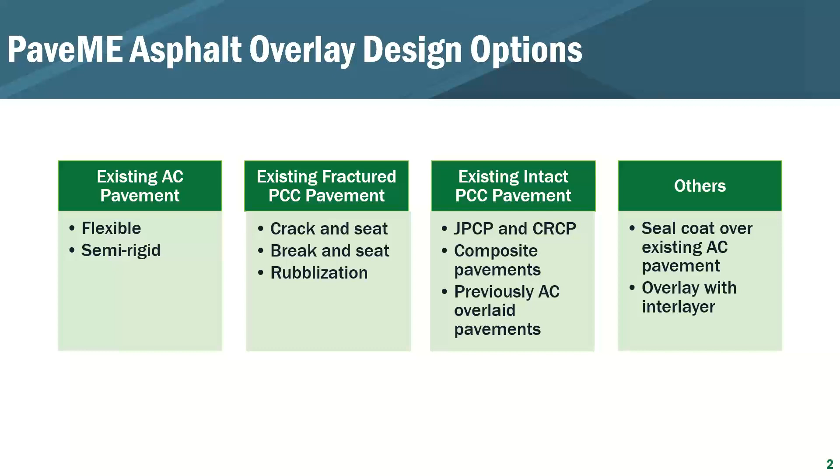Seal coats and overlay interlayers, we are not going to discuss at all today, so that'll have to be maybe another session.

As Kelly also noted, for the example that I'll be demonstrating today on asphalt overlays of an existing asphalt pavement, it's based on information obtained from Harry at Virginia DOT. For both this session and the next session that I'll be presenting, it is based on the information provided.

Probably one of the big things when we received the files from the DOTs, there was a version difference. My company only has version 2.6, and both the Virginia example and the next example were based on an earlier version. So I had to still use the material property information from the DOTs, but I had to switch back to the global calibration values just to be able to run this example.

So again, the example I show you is based on an actual project, but the calibration coefficients are global, so there may be differences than what the DOT would actually see. So Harry, don't be too surprised at the results you'll see on this analysis or demonstration.

So the project is on a four-lane divided rural interstate. As I said, the modifications had to go to 2.6. The climate location was slightly different—we were having a couple of challenges getting the original climate file to load, so we picked one that's close. And of course, as I said, the global calibration factors are slightly different.

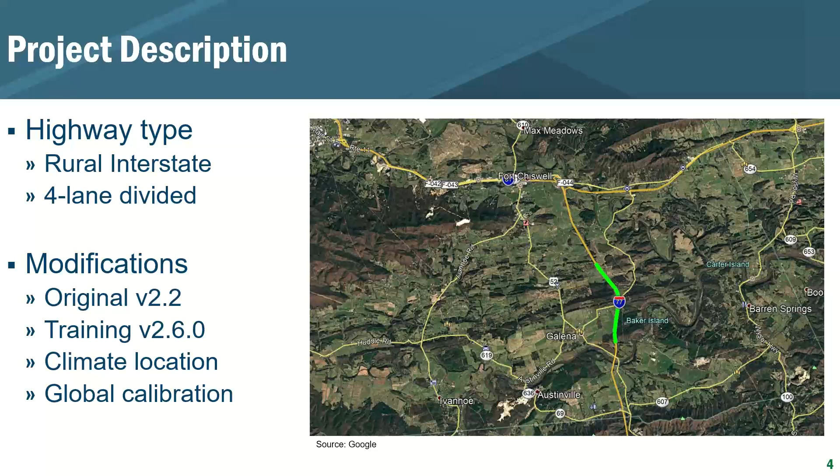The distress prior to the overlay—the overlay was conducted after 2010. You can see here IRI is the circles, and rut depth is the triangles. There's a little bit of variability in data collection, but we also kind of know the reasons for some of that variation. Pretty much really good IRI, holding in the 80s, the high 70s to low 80s.

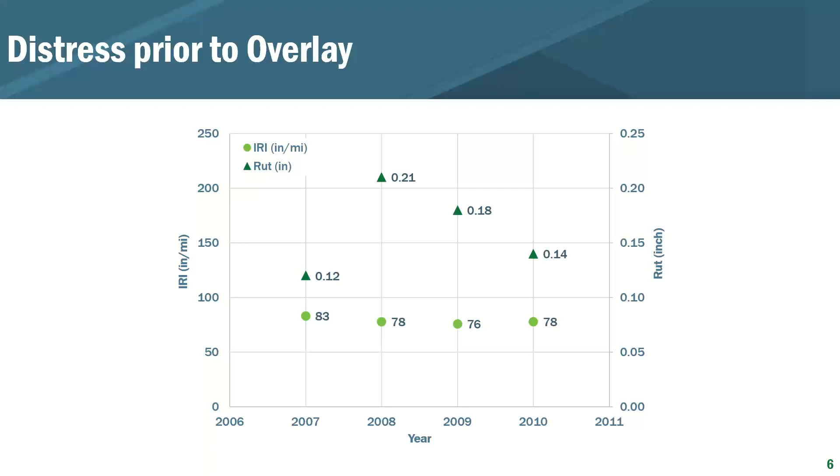The rut depth, at least in 2010, is about 14 hundredths of an inch, so a little bit of rutting—still pretty good. But certainly the issue now becomes alligator cracking and the presence of transverse cracking. Alligator cracking is shown in circles, transverse cracking as the triangle shapes. You can see a better trend here, showing that in 2010 there was a little bit more than 15% alligator or fatigue cracking and about 3,000 feet per mile of transverse cracking. So again, the predominant distress for this case is cracking, more so than rutting.

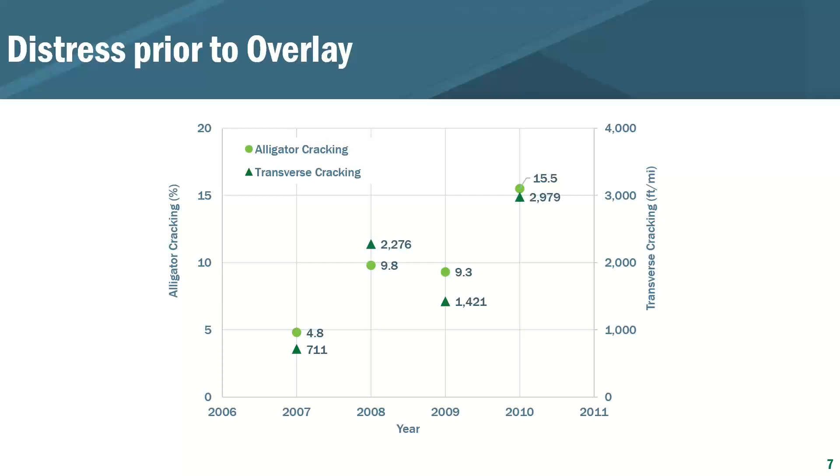All right, now what I'm going to do is go through a demonstration of the software—during a webinar, as you know, that's always a risk. So what I'm going to do is go through and do screen captures and try to demonstrate the process through those screen captures. Hopefully that'll be good enough information that you guys can actually follow along.

I'm just going to tumble through the PaveME inputs, top to bottom on the left-hand side of the input screen. The first one is just to show that, hey, we're going to do an overlay of an existing asphalt pavement. Design life is 15 years. The original was built in '78. Construction was in June of 2010, with traffic loading starting September of 2010.

The existing pavement, as you see on the right-hand side, we've got some overlay thickness. We've got 12 inches of existing asphalt, 8 inches of an aggregate base, 6 inches of a fill material that has a CBR of 30, and then an A-7-6 AASHTO subgrade classification.

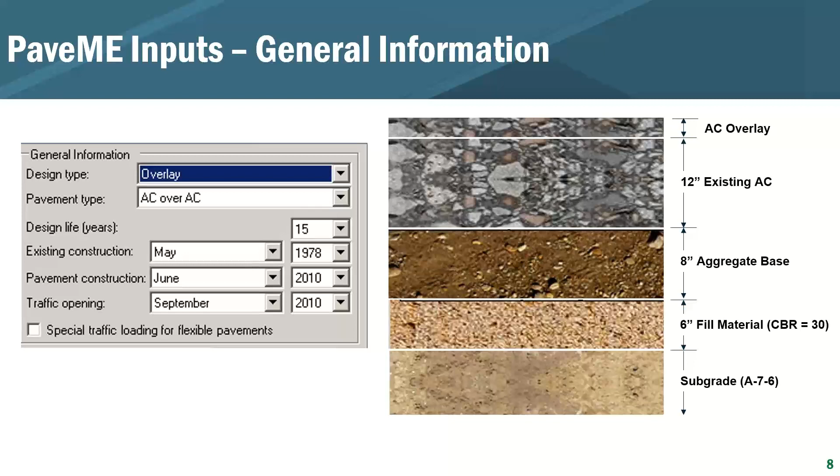All right, so the traffic screen, and I'm not going to bore you too much with all the details, but I will kind of show you the information that was included for this design, and we'll blow them up as we go through, just so you can see it a little bit easier.

So the two-way average annual daily truck traffic is at about 11,200. Number of lanes in the design direction is 2. The percent of trucks is 50%, and then 90% of those in the design lane with the operational speed. For this case, the traffic capacity was not enforced.

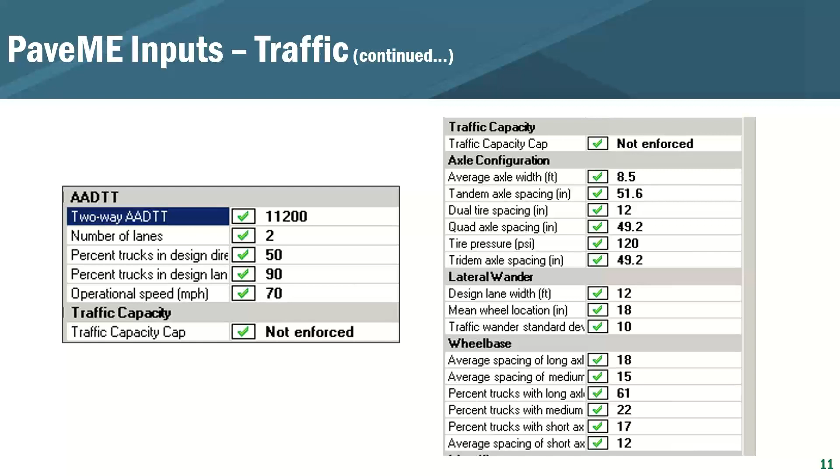I believe on the right-hand side, the configuration, the wander and the wheelbase is pretty standard. I believe they're all default values that were selected for that, so probably nothing too exciting to change there. But certainly, if you have a specific or a special loading case, that certainly can be modified.

The distribution of vehicle class and the growth rate, I think, is just taken from the traffic information, and then the DOT used a growth rate of 0.7% compounded over the life.

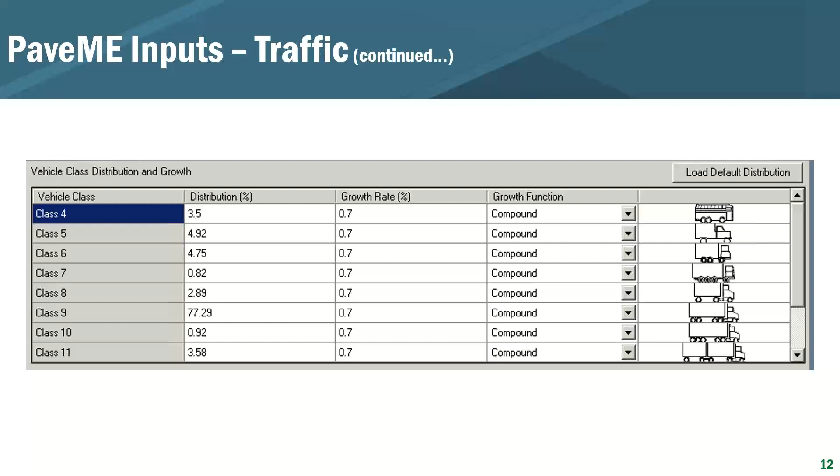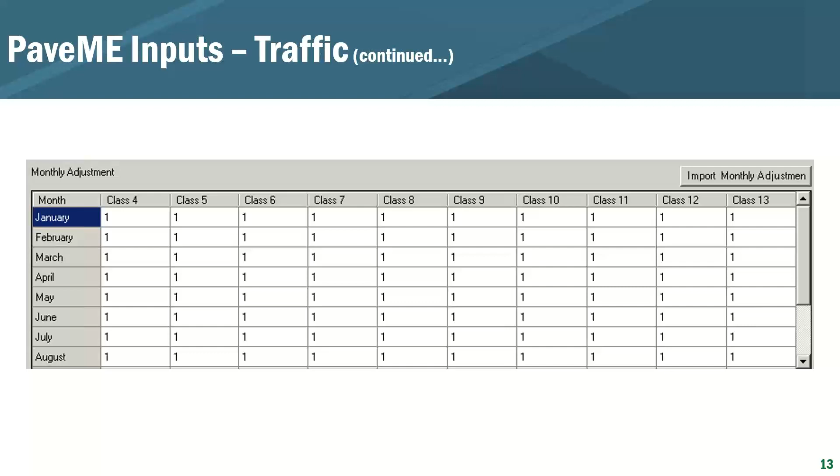As far as the AC layer properties go, there's a number of them. Certainly going in and doing an interface, doing the endurance limit, whether you include it or not. In this example, we did not use the endurance limit, but you do have to go through in the AC layer properties location and identify the rehabilitation level.

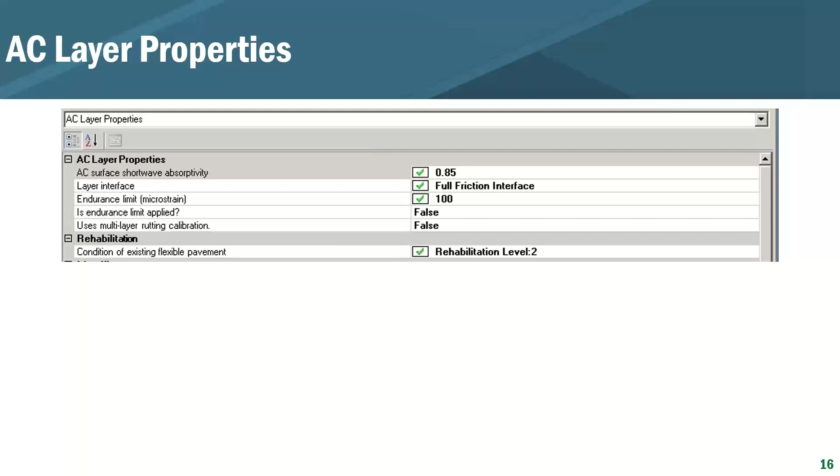And so you actually get a couple of choices. Certainly you can go level 3, level 2. Level 3 gives you much more of a general condition, whereas with level 2, you can actually get into more specific details of the presence of distress.

So both of them have the ability to include the mill thickness, which in this case we used 2 inches. They also have the ability to put in rut depth, so we went ahead and did those regardless. But certainly where they differ is in this structural rating, environmental rating versus actual distress. And if you've got the data, it is always best to use it.

And so we would proceed forward in this design example using the level 2 analysis, and so that would be the case. And I know that's supported by at least all the discussions we've had in the user group meetings. If you have a higher level of input, go ahead and use that if you feel comfortable with the information contained in your database files.

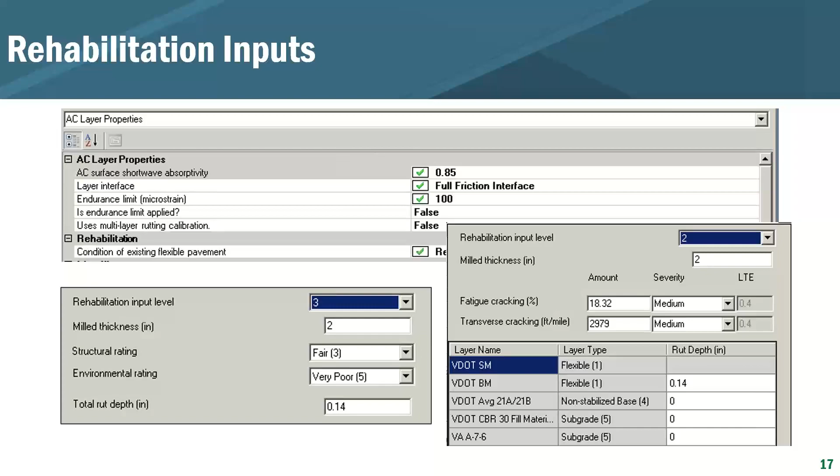All right, getting into the AC layer properties. A lot of this information, hopefully, you've got contained in your materials database that's been transferred over, so we can go ahead and use that from the Virginia file we were sent. We had all that information, so we'll go through the inputs one by one, but much more in general. I don't want this to be an exercise of entering data into a spreadsheet or into the software, so we'll just hit the highlights of what was used in this training module.

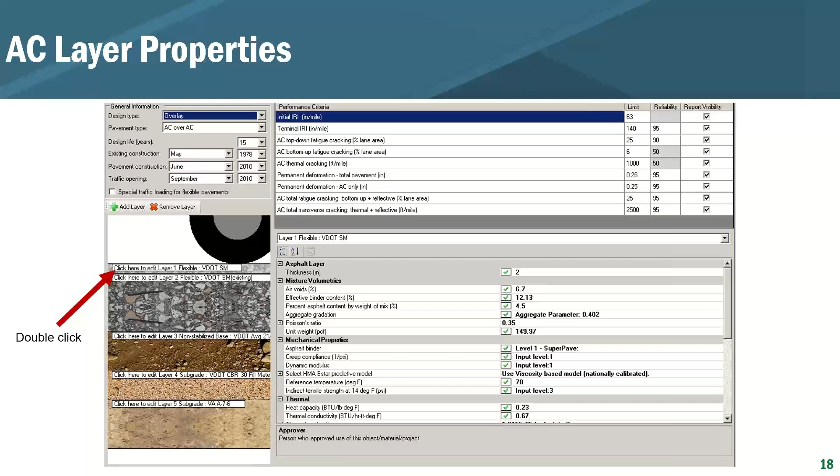As many of you know, you double click on the layer in question to edit it, and that brings up the tab where you can see your thickness, your mixture, mechanical properties, and thermal properties.

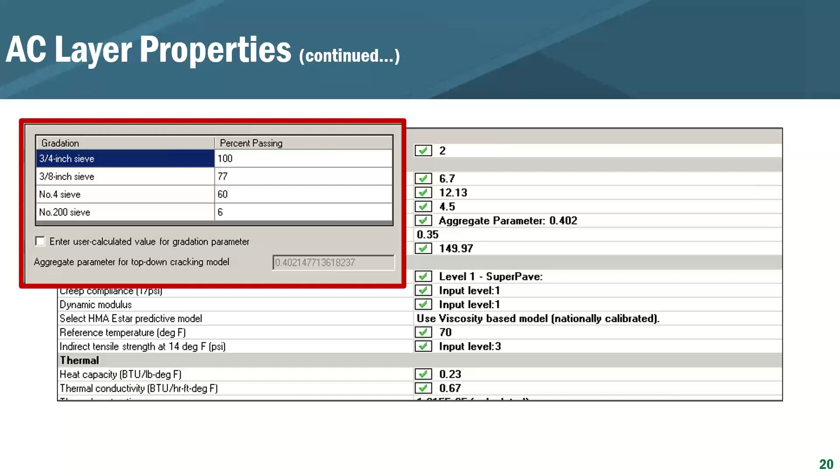Certainly the aggregate parameter allows you to input your sieve sizes on the 3/4 to 3/8, the number 4, the number 200. Going down for the Superpave or level 1 on the mechanical properties, you can go in and, if you have that information, put in your temperature, your binder G-star, as well as your phase angle.

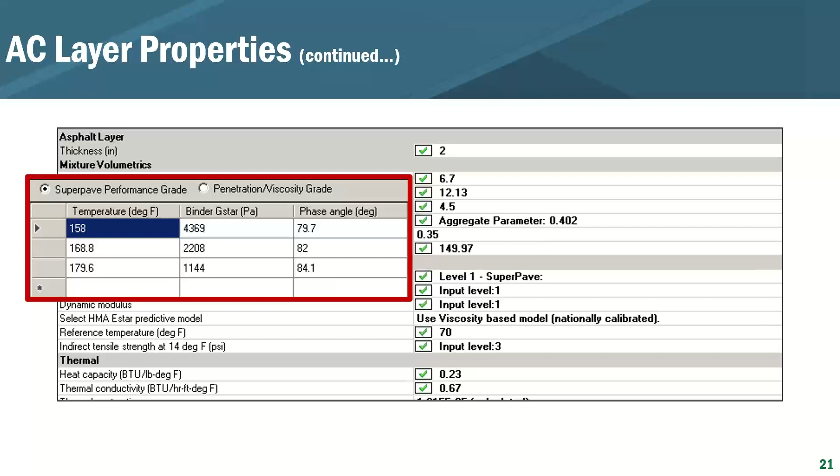Same with creep compliance, you can load in that amount of information. Similarly with the dynamic modulus, you can go in and put that information. And for both the creep compliance and dynamic modulus, you can change your level of input.

So if you put these into a level 3, it'll change that top defining point from level 1 Superpave to a level 3 when you change your dynamic modulus and your creep compliance back to those values.

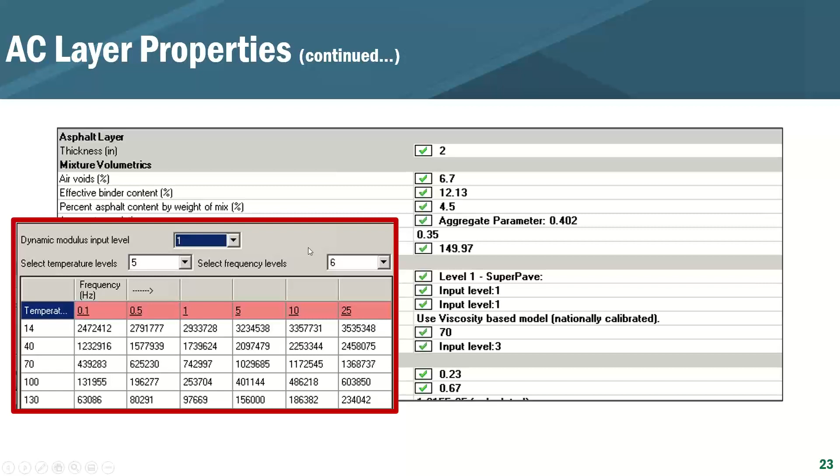And certainly the indirect tensile is the same. You can either go in and use a level 3 input, or you can use the G-star based model, but that's not been nationally calibrated. So I know that for the most part, a lot of agencies are using the viscosity-based, nationally calibrated model. But you have the ability to change that, to change the reference temperature, and that type of information if needed.

And this is just a summary. I didn't want to go through the layer properties for both the asphalt overlay and the existing, so I really just summarized it here on this table, showing what was used for mixture, volumetrics, mechanical properties, and thermal for both the overlay, what I just ran through, and the existing.

I think probably the key here is the air voids on the existing are slightly lower than what was used in the overlay, same as the effective binder content. And for the existing, it was a PG 64-22 for the asphalt binder, but everything else is pretty much very similar. The thermal properties are the default properties used in this case.

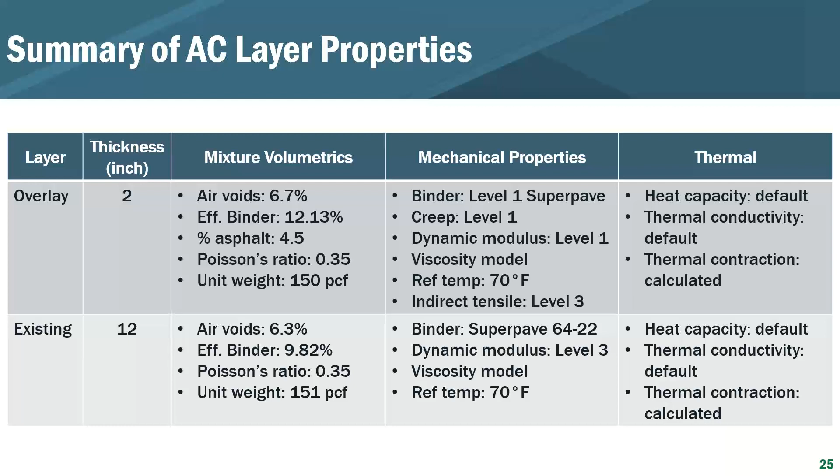Similarly, when you go through double clicking on the base and the subgrade layer properties, probably the modulus is of interest here. And there you've got the option of going input level - for input level 2, you can go in and select your type of material or type of evaluation, be it resilient modulus, CBR, R value, and then put in that value for that particular method.

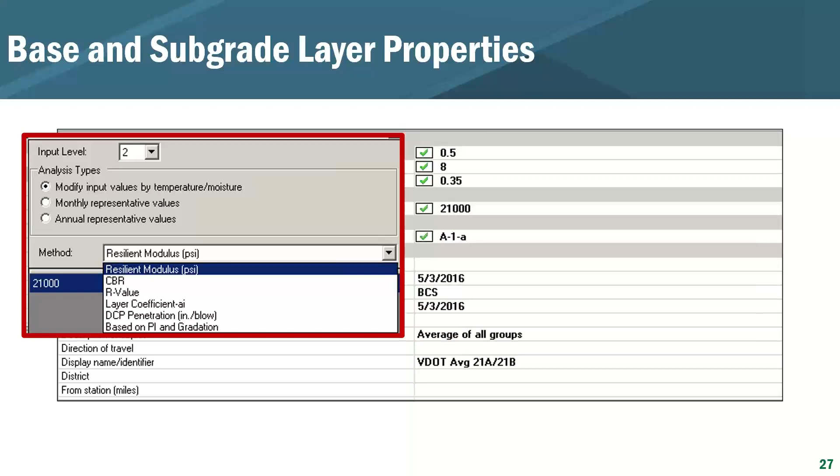Certainly you can also go in and change or select your gradation, putting in the gradation, the liquid limit, the plasticity index, all that information. Or certainly you can do level 3 and just go in and select, hey, I've got an A1 soil, bringing in all the information needed for the analysis.

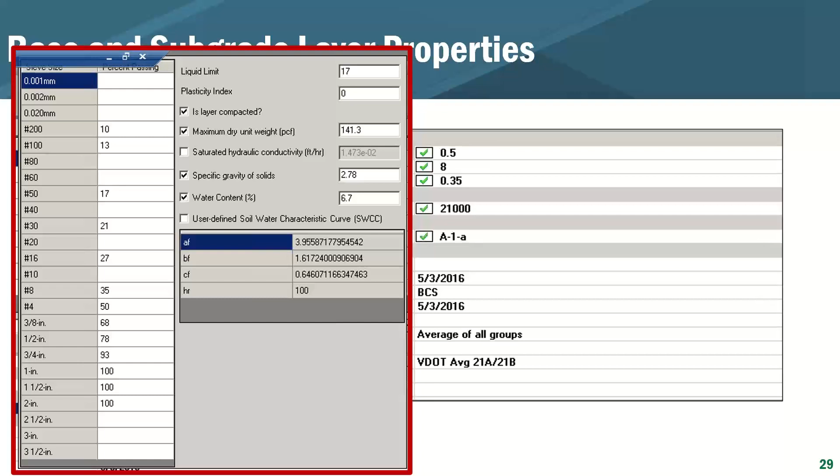Similarly to the asphalt, I went ahead and summarized the unbound, subgrade, and base layer materials. As we noted, the stabilized base or non-stabilized base is 8 inches over 6 inches of fill over the subgrade. You can see the unbound coefficient layer of earth, lateral earth pressure, Poisson's ratio, modulus, and soil type for each one of those layers.

This is just the output from the PavementME PDF file. I chopped out the middle piece, which talks about the asphalt binder, because I really like to make sure when I go through and actually do a design, did I put everything in right? So I really do look at this particular output from the program just to make sure that, yep, I did put in 2 inches of an overlay, and yep, the existing is 8 over 6 inches of fill material.

I always like to look at the heavy truck traffic as well, again, to make sure that the values I thought I input are actually what I input. But it's always interesting to me to see the impact of the heavy trucks over the time period. It's always surprising how quickly 15 years of traffic accumulates. I'll have to say I still miss ESALs, but I know the switch to heavy trucks is happening, it's just certainly slow, at least for me.

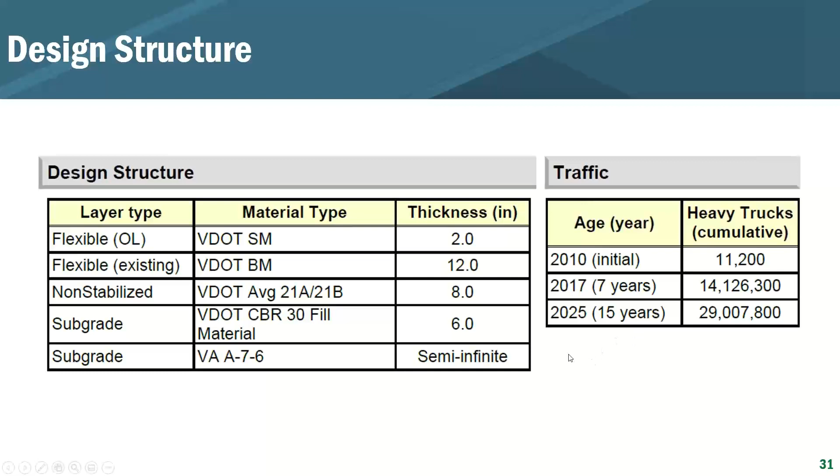All right, so what I wanted to go through is kind of evaluation scenarios. I think what is intriguing about PaveME certainly is the process it goes through, the whole mechanistic empirical. But I think, what do you do with the output? Is it just something that hopefully everybody's getting a good sense, getting a good feel for the impact of changes to designs and how that influences performance.

But also it's something that hopefully you're not working in a vacuum. And if PaveME comes back and says you need 17 inches of asphalt, maybe you're doing that little data check on, maybe that doesn't quite pass the test.

So rather than get into a lot of the specifics of software operation or the workings of the verification, calibration, the model development, what I really wanted was to highlight, so what are the results? What do you get if you go through different types of scenarios using the PMED for evaluation of any given project?

But for this one, the file that we received from Virginia was a 2-inch overlay, or a 2-inch mill and a 2-inch overlay. So pretty much just a mill and fill type of operation. So I said, okay, let's see what's the impact of no milling with an overlay, what's the impact with mill and fill, and then I'm going to vary the thickness of the overlay on that one as well.

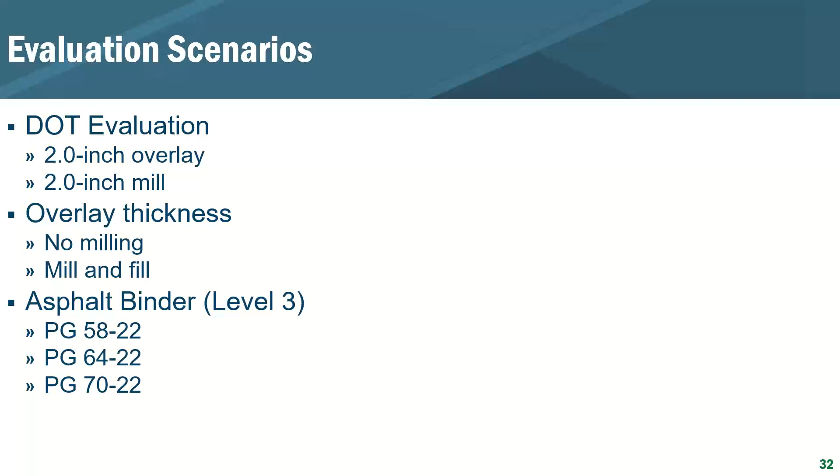All right, and so here again, I'm not going to drag you through all the various databases or the various tables and graphs that are populated in the output of the PMed runs. I'm really just going to focus on the condition, the target value that we used in the analysis, and then there's going to be a series of columns added to this table that demonstrate the evaluations that we did. And again, just to remind you that we're looking at 95% except for the bottom up and fatigue and thermal cracking, where we used the 50% default value.

All right, for the 2-inch overlay where we did no milling, certainly the IRI fails to meet the criteria. But I also would have to say that Harold has said this many times in our past meetings: don't change your overlay thickness because you're trying to meet IRI. And I completely and totally agree with Harold on that. There isn't performance-based information in PMed. Certainly they had to make, as many of you remember, a lot of assumptions in being able to predict IRI.

And I guess my other comment too would be that Virginia had great IRI on this road prior to the overlay, and even though their target is 140 in their design process, we didn't see that type of effect on the previous road. It was maintaining a pretty low IRI throughout the process. So again, I think you always have to take IRI with a grain of salt before just saying, yep, I've got to make my pavement thicker, or I've got to change something to meet IRI. So always be leery with that one.

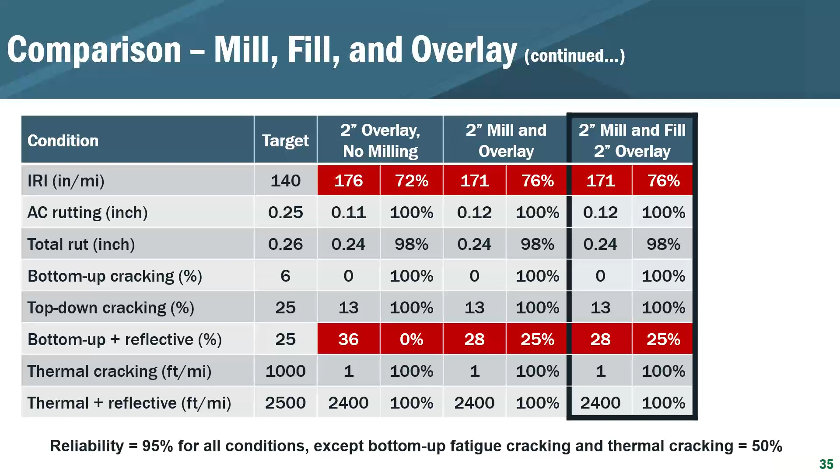And again, that's not maybe cost effective. There may be methods that a DOT knows help improve the reflective cracking or help minimize it. And so certainly those types of activities should certainly come into play rather than just automatically increasing the asphalt overlay thickness to get rid of some of the distress types.

All right, and this is just a caveat in the manual of practice that pretty much says, hey, the LTPP information obtained to develop the models used for the local or global calibration were based on information that may not have shown that there was a difference. In the LTPP, there wasn't really much of a difference in performance, mill versus no mill, using an interlayer versus not using an interlayer, using a seal coat versus not using a seal coat. And certainly if any difference does exist between a mill and a no-mill situation in your agency, those should be used in the calibration process. But the globally calibrated models did not show a difference.

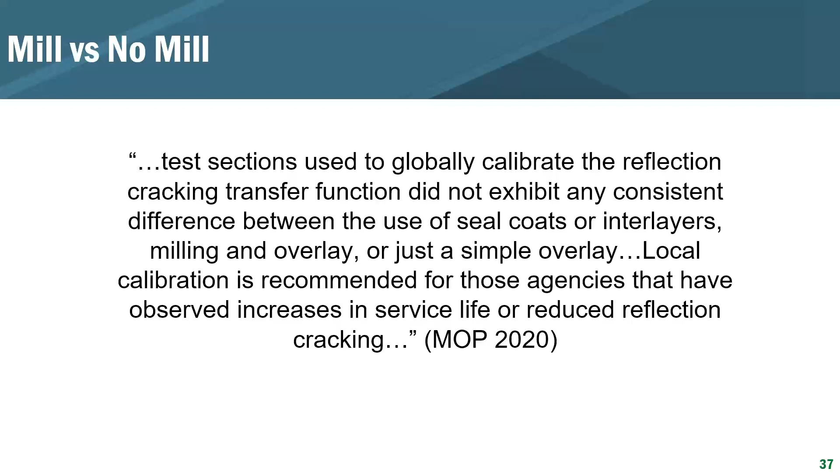So with that, I also said, okay, let's go back and see what changing the binder grade has to do with it. I had to disconnect the level 1 material properties for the asphalt overlay. Since I don't have Virginia's material database, I'm just trying to demonstrate the difference rather than give an absolute value. So I changed the inputs on the asphalt layer to allow me to put in a level 3 and put in the PG grade.

So try not to go, wait a minute, how come all my rutting is higher? Because it's different. It's a different process to do the evaluation.

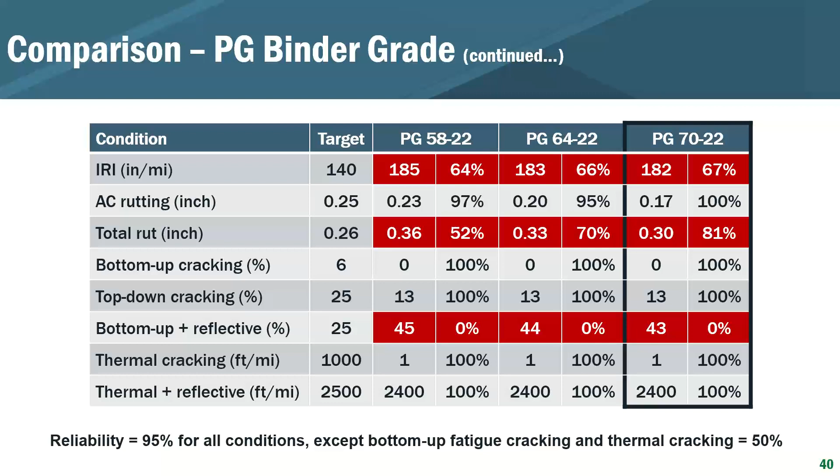And we slightly changed the bottom-up reflective cracking, but again, we're not expecting a change in PG binder to actually stop some of the reflective cracking. So by itself it would not do that. So, all right, that was a fast whirlwind tour of the asphalt overlay of asphalt.

Here it is again, you've got now an urban highway type, 4-lane divided, and similarly the same modifications we had to do to get the evaluation to work in the current version of PMED. Justin had provided us the original file based on version 2.3. We used version 2.6, so again we had to do a slight change in the climate location, as well as using the global calibration coefficients rather than the ones provided by Justin. So here's a shot of the pavement.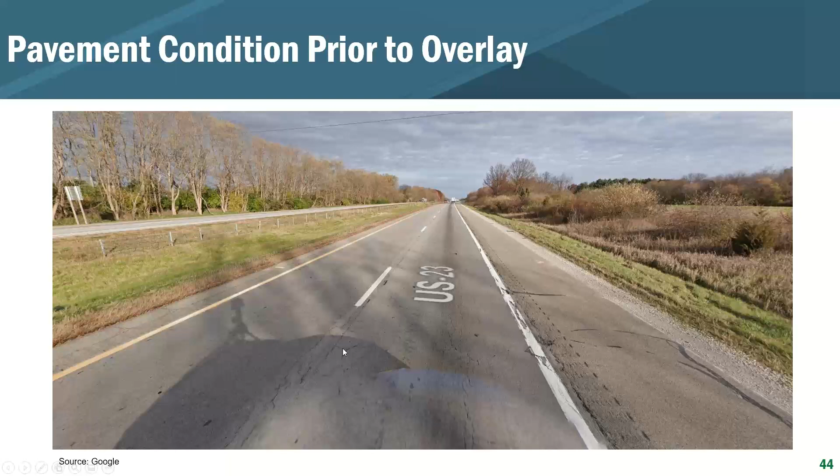This is on US 23. Again, you can see the existing has got a couple of shoulders, a narrower left shoulder and wider right shoulder. You can see the lay of the land, so to speak, and some of the existing condition of the pavement. Again, just another shot to give you that perspective.

The distress prior to the overlay occurred, at least in 2019. The distress was this distress index that the Michigan DOT uses, looking at the IRI as well as rut depth. Rather than a year, I was actually able to get the information along the project, and we go from milepost 0.5 approximately to almost milepost 10. You can kind of see how that distress changes, and the index pretty much is on a scale from 0 to 100, 100 being good. So you can kind of assess there, as far as their distress index goes, there is cracking happening on the pavement prior to the overlay.

IRI is relatively good, getting a little on the high side, but still well within the acceptable range, and very minimal at least in the increasing direction. We only had about a tenth of a weighted average of rutting, whereas in the decreasing direction it's almost twice that - again, not a terrible amount of rutting. IRI is good, and as I said, both the increasing and decreasing directions have a distress index showing, so they do have cracking occurring prior.

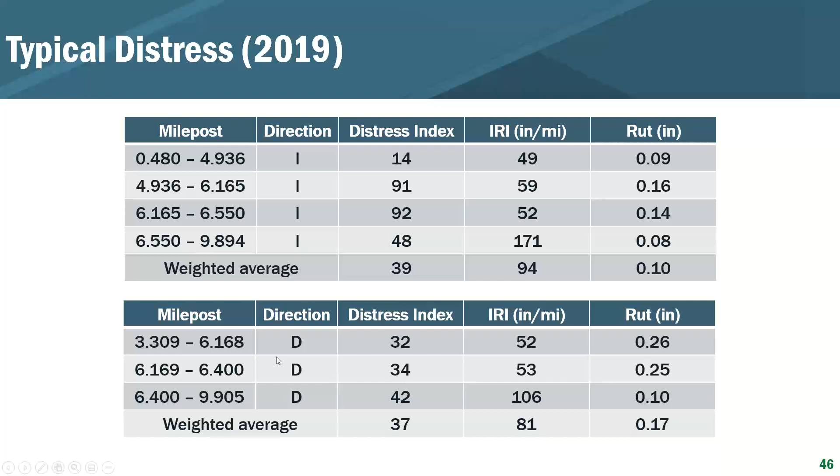For this, the Michigan DOT uses an initial IRI of 67, terminal of 172, and again similar as far as the reliability goes. It does use 50% now for thermal cracking, as it does with the AC over AC.

Again, similar default values for thermal cracking, with total thermal plus reflective of 1,000 and 2,500, and top-down cracking of 25%. A lot of it is very similar. Here, Michigan wants to know if their design exceeds 15% while underlying cracking of the JPCP is still occurring. So there's a way they're also aging the distress in the JPCP, much like they were doing with the asphalt. The existing pavement does continue to fatigue with time.

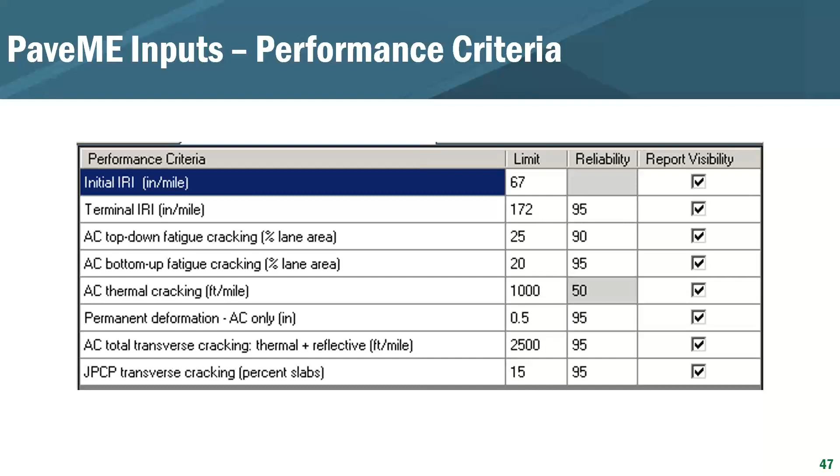In this similar case, we've got the AC overlay. The existing asphalt is 2 layers: one is 2 inches thick, the other is 3 inches thick, over 9 inches of JPCP. There's a 4-inch aggregate base, 10-inch sand base under that, sitting on top of a clay subgrade with a liquid limit of 33 and a plasticity index of 15.

Again, we're using an asphalt overlay of a JPCP and looking at a 20-year design life. The original was built in 1961, with the new asphalt over the concrete being placed in 2023, a couple of years after the 2019 date. So the pavement continued to deteriorate between 2019 and the intended overlay of 2023.

Similar to the asphalt over asphalt case, there's traffic inputs, and I'm just showing this so you get an idea of what information was used. Two-way AADTT was about 7,900, with a 51-49% split in the direction of traffic, and 92% of it is in the design lane for this analysis. Again, the DOT did not put a traffic capacity cap on the analysis.

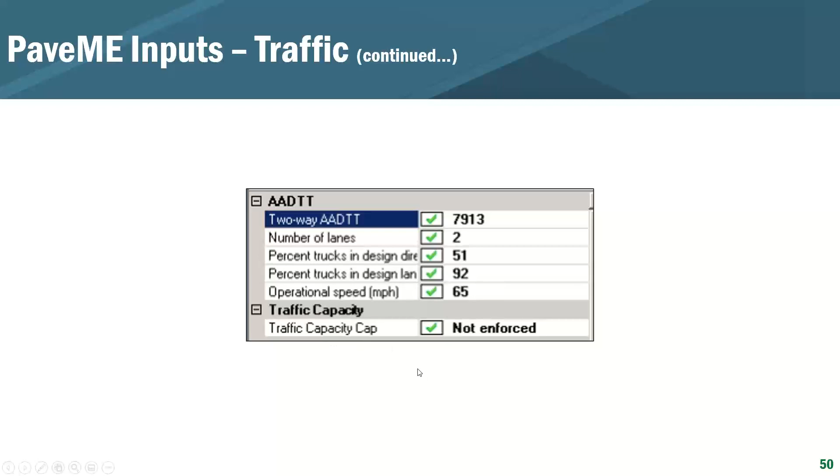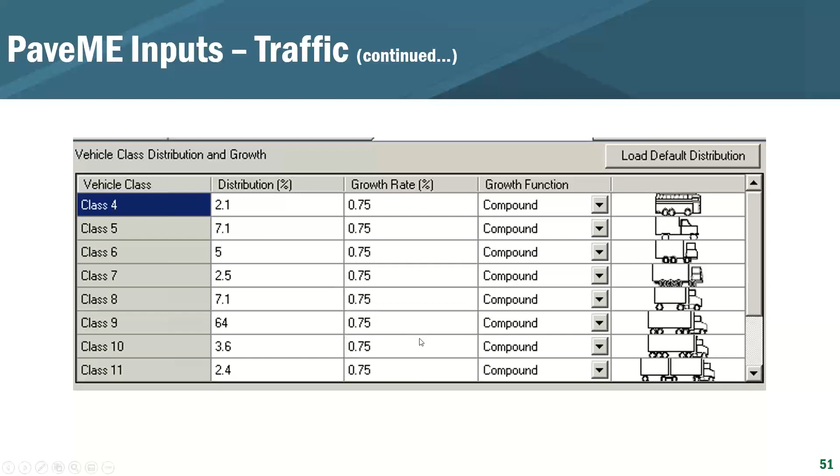Growth rate in this case is going to be very highway-specific, but here the DOT is looking at a compound growth rate of 0.75% for all vehicle classes. The distribution for this road differs depending on the class of truck as well as the month. I'm only showing you through August for simplicity, but there's a similar type of variation in traffic for the remaining months.

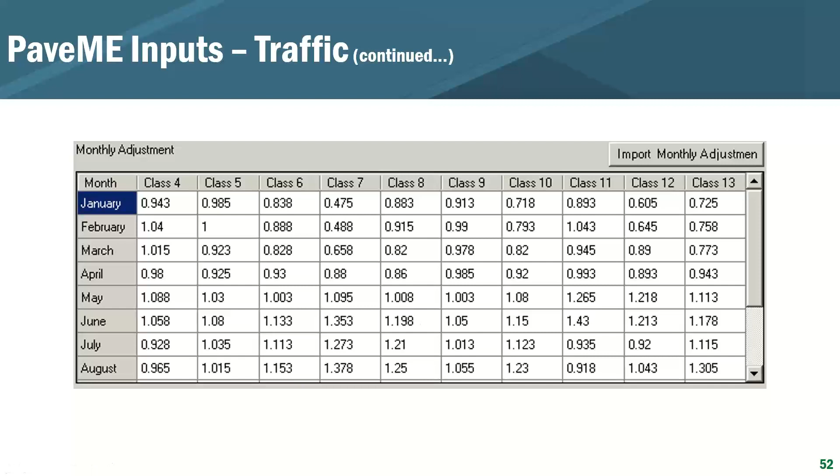So again, it's based on the traffic information you get, and hopefully this is in a database so nobody is typing in all this information, which I know the majority of DOTs have. That's a good thing. Similarly, as before, you're able to vary the class of truck by single, tandem, tridem, and quad axle, and put that information in. That's pretty standard equipment and information.

Here again, being able to pick a location of the project in Michigan. We had it slightly different than what was provided, but it's still pretty close to the information we were able to grab.

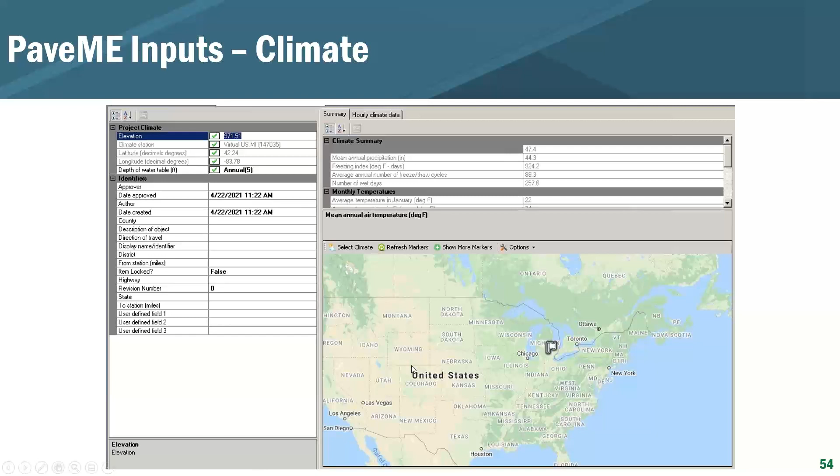Different from the AC over AC case, for AC over JPCP you need to go in and include the design properties so that we know the dowels used in the jointed plain concrete pavement, the joint spacing, and all that type of information. This is needed to help in the performance prediction, and certainly for quantifying the continued damage that occurs in the JPCP layer.

So here we're just looking at dowel joints. The original was built using 1.25 inch or 1 1/4 inch dowel bars at a 12-inch spacing.

Then looking at the erodibility index, this is an assessment of the material underlying the concrete layer, whether or not you have full friction, what that loss of friction is, and how many months it takes. Whether it's bonded or unbonded - I think it's unbonded. Unbonded JPCP was false in this case; otherwise you'd say it's true.

Going through the joint spacing, you can identify if it's uniform or random spacing. In this case, the joint spacing is at 14 feet, but if you had variable spacing, you could put that in as well.

Looking at curl and warp, again these are default values, around -10. Being able to put in the sealant type - there are a couple of options, which I didn't showcase, but there's the ability to select that - and then whether or not you have a tied shoulder. In this case there is no tied shoulder. And then whether or not you use a widened slab - in this case, a widened slab was not originally constructed.

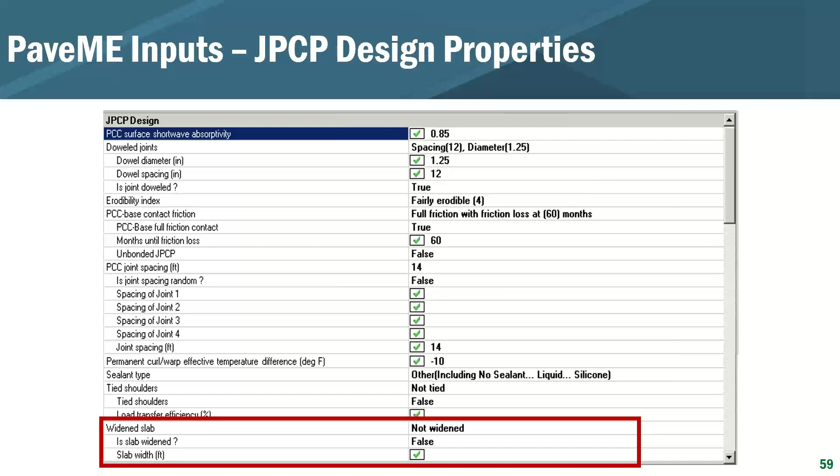All right, so similar to what I showed on the AC over AC, here's the properties of the existing layer. And in this case, we actually did run the two layers as separate. You can see the only difference between the original... how do you put this.

Let me take that back. I think I had an error in my layer screen. The existing is just 3 inches on top of the jointed plain concrete pavement. As part of the rehab, there were two separate overlays. The first was 2 inches, and then they overlaid that with 1.5 inches. So the total overlay of the existing composite pavement is 3.5 inches.

So just to get that clear, I've got to go back and fix my original slide there. All right, so total 3.5 inches of overlay in the new design process. That's what we're going with.

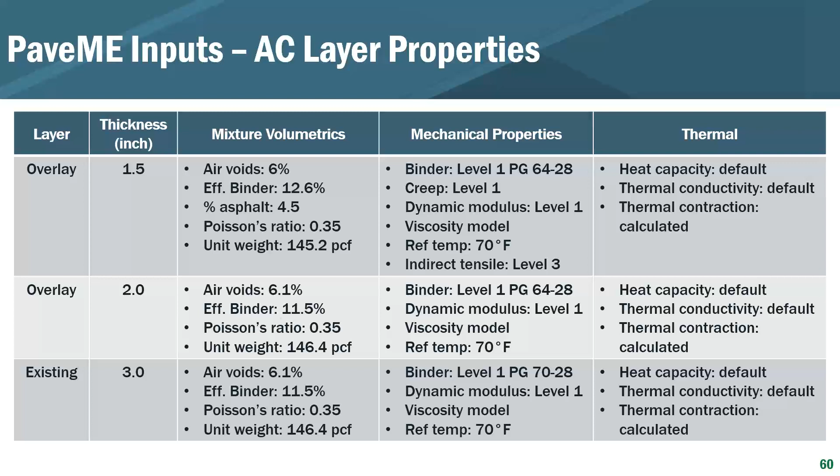As far as the base layers, I didn't go through all the inputs showing you those screens because they're very similar to the ones used for asphalt over asphalt. On the base and subgrade layer properties, the coefficient of lateral earth pressure is the same as what was used in the AC over AC. These are default values, so that makes perfect sense.

For the non-stabilized 4-inch base, it was an A1A soil with a resilient modulus of 33,000 psi. The sand subbase at 10 inches was 20,000, sitting on a somewhat soft subgrade with a PSI of 5,000, which I think would be typical of what we'd expect for a clay type subgrade.

All right, so this is just my little check to make sure everything is doing as expected. This shows that the existing overlay is 3 inches with the 3.5 on top. Perfect, that's what we wanted.

And then the original heavy trucks is 7,900, progressing over the 20 years to see 29 million by the time we get to 2043 as far as cumulative trucks go.

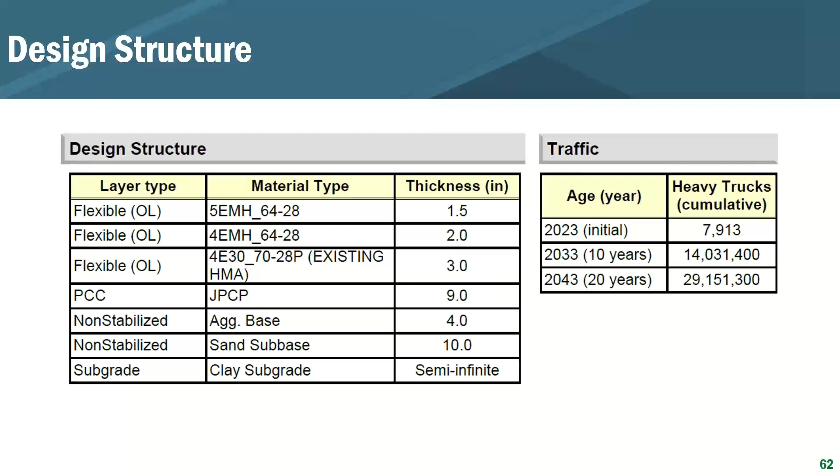All right, similar to the AC one, I went ahead and said, okay, what happened if the original design by the DOT was this 3.5 inches, and they repaired 2% of the 10% of distressed JPCP slabs prior to the overlay. I wanted to see the impact of what you repair versus what remains distressed. So I did a comparison of having 10% distressed slabs and not fixing a single one of them, versus having 10% distressed slabs and fixing every single one of them. You can see how that varies the performance and what that impact is.

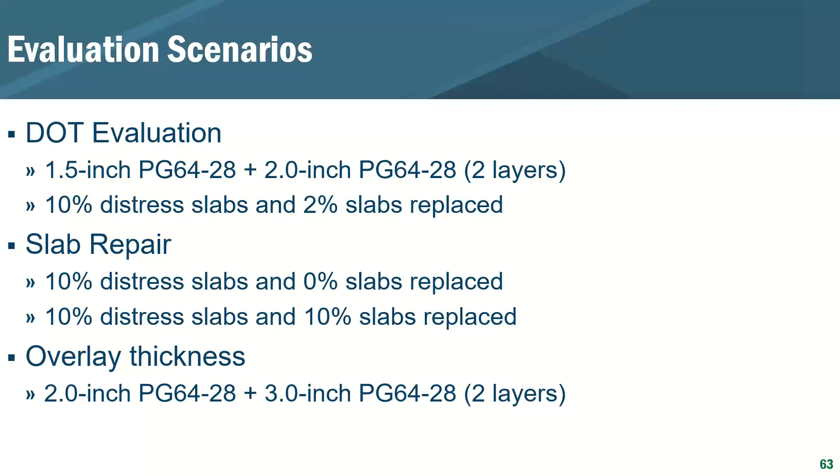I didn't think changing the binder was going to solve the reflective cracking that's actually occurring. So rather than a 3.5 inch overlay using the PG 64-28, I said, let's put down 2 layers instead - one 2 inches thick, the other 3 inches thick. So essentially just increasing the asphalt thickness and seeing how that impacts the performance results.

All right, so looking at just the slab repair. Again, this is looking at 10% distressed slabs where I'm not going to fix a single one of them. Everything as far as IRI and the rut in the asphalt layers all look good. The bottom up cracking looks great, nothing happened there.

However, we've got quite a bit of transverse cracking. Our target was 2,500, and we're 3 times that. Same with thermal cracking, we're seeing quite a bit there as well.

As you'd expect, for JPCP transverse cracking, we didn't do anything to 10% of those slabs, so sure enough they're all going to continue to cause problems and continue to crack. It's not unexpected that our target was 15, but the predicted value is 24. Again, that's no surprise - I fully expected that to happen.

All right, so what happens if we go ahead and say now we're going to actually repair 2% of the 10%, so the DOT design in this case.

And again, this is using their 3.5-inch overlay in all of these cases that I'm showing you here. So I'm just changing the slab repair portion of it. We really didn't do a heck of a lot as far as total transverse cracking goes. The thermal cracking was unchanged, and we slightly improved the JPCP transverse cracking, went from 24 down to

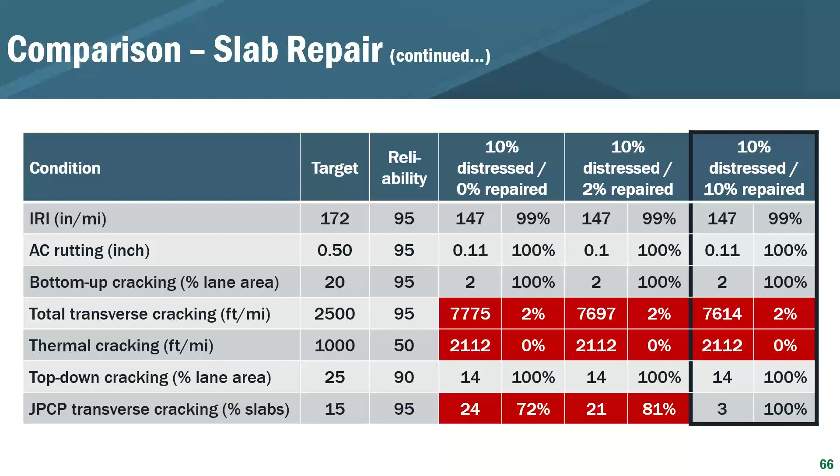All right, so what happens, oops, sorry about that. So what happens if I say, you know what, I'm going to change the overlay thickness? And so what I put on here is I left fixing everything, because fixing all the distressed slabs. Again, I had to pick one, so I went ahead and picked that one, just so that we can more focus on the impact of total transverse cracking and thermal cracking, more so than, hey, we still have a transverse cracking problem in the JPCP.

By going to a 5-inch overlay versus the 3.5-inch overlay from the DOT, we actually improved the total transverse cracking as well as the thermal cracking, but not significantly enough to meet the target criteria. So it's still, we're still twice the amount of transverse cracking that we wanted, and twice as much thermal cracking. So again, you're not going to solve some of these problems with thickness alone.

And again, I know that's something we kind of continue to discuss. Even with the AASHTO 93 guide, you never can solve all your problems by a thickness increase. And so that still holds true, and you shouldn't be going through and trying to get rid of something by increasing the asphalt thickness, because I can tell you won't.

I believe I didn't try running it thicker, but I think it's something that probably requires some other type of mitigation effort to be able to handle that, as well as knowing that in your agency - so Michigan maybe says, you know what, the 1.5 or the 3.5-inch overlay actually helps mitigate transverse cracking - then that's going to show up in your calibration effort. Again, these are using the global values, but in your agency, if you know that doing a 5-inch overlay of a JPCP or composite pavement works, then you've got to go with what actually works, and hopefully that's shown in your calibration effort.

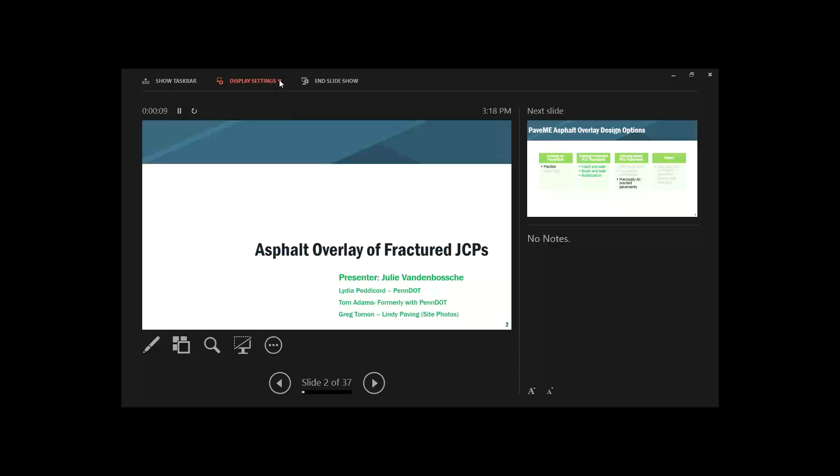First I want to thank Lydia Peddicord with Pennsylvania Department of Transportation, and Tom Adams, who was formerly with PennDOT, as well as Greg Tomon from Lindy Paving, in providing the project. As I knew Linda would do and did do a great job talking about how to define the inputs - a lot of them are similar, of course. So I'm going to focus mainly on the inputs for fractured concrete pavements, and the focus is on how to interpret the project such that you can define the input. So thanks again to Lydia, Tom, and Greg for providing the opportunity to do that. They presented the project information with some great design information so that I was able to do that.

And again, this will be crack and seat, slash break and seat, and rubblization.

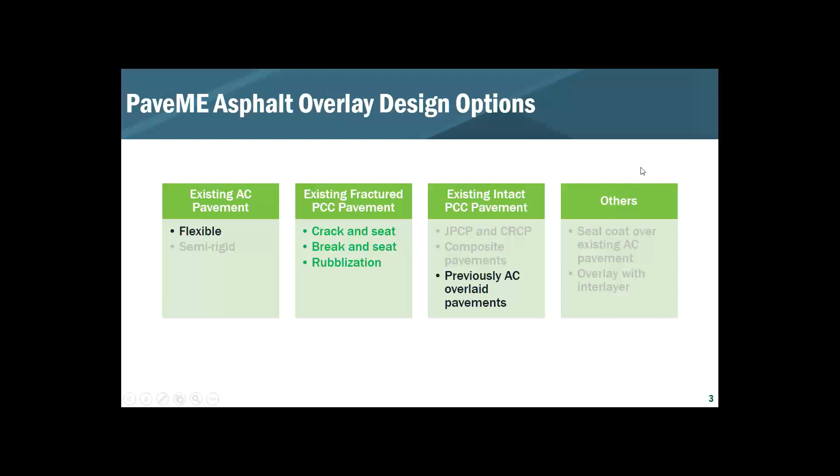Just a kind of review - I saw in the poll questions that very few people are using Pavement ME for designing these types of pavement structures. Maybe that's because they don't do a lot of this type of pavement structure, but hopefully through this presentation you'll have a better feel for how easy it is to use Pavement ME as a design tool for these types of pavement structures.

Crack and break and seat are the same thing, with the exception that break refers to a jointed reinforced concrete pavement where you have reinforcing mesh in there. So you don't want to just crack the pavement structure, but you also want to rupture that steel. So the project we're going to be talking about is a jointed reinforced concrete pavement. I'll be referring to break and seat, which just infers that you're going to rupture the steel when you perform your

demolition of the slab. So in crack and break and seat, of course, that's larger fragments where you want them 1 to 2 square feet in size. And these pieces are then seated in - so you fracture the slab and then you seat it into the underlying granular layer. Then rubblization is where you're just going to rubblize this into more of a nice aggregate base, and those particle sizes are 3 to 8 inches when we refer to rubblization.

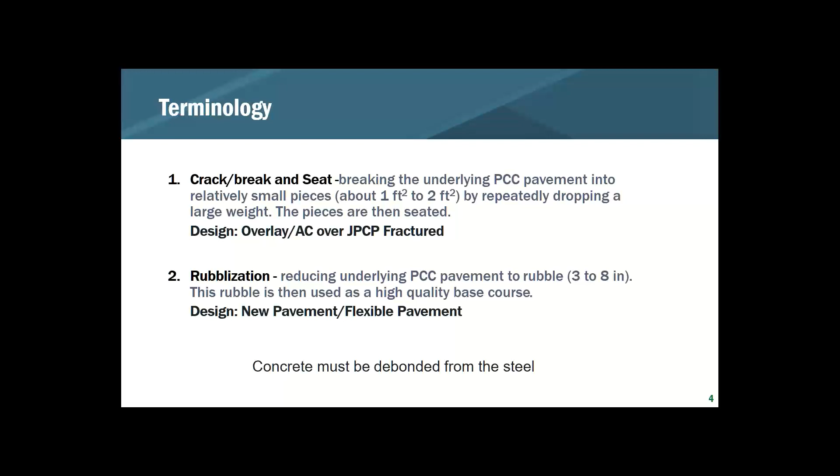The big thing too to remember is that when you're performing this, you want to make sure that you're debonding the steel from the concrete. So the idea is that you'll have nice aggregate interlock between particles, regardless of whether you're rubblizing or doing the break and seat. So what I was going to do with the project that PennDOT was nice enough to provide information on is first talk about it from a break and seat perspective, and then look at rubblizing.

When we're looking at break and seat, crack and seat in this situation, the design inputs more closely affiliated with specifically a break or crack and seat involve looking at the performance criteria, where you're looking at the AC total transverse cracking - that's including thermal plus reflective. The design criteria has thermal pulled out separately, but also then thermal and reflective, where you have the concrete underneath that distress reflecting up. Hopefully, again, the whole idea of the break and seat or the rubblization is to make sure you're not getting that reflective distress.

In the design type, as I just briefly mentioned, for the break and seat, that's going to be an overlay design, and you're going to select the subcategory of AC over fractured jointed plain concrete pavement. This, of course, is a jointed reinforced pavement, and there's a question that came up regarding the difference before, but it's going to be the same - you want it to interact or behave the same underneath it whether it's a crack and seat or a break and seat where you have the reinforcement. So both of them, if it's jointed reinforced, you want to make sure you're debonding that concrete from the steel, so then they'll act similarly or in a similar manner.

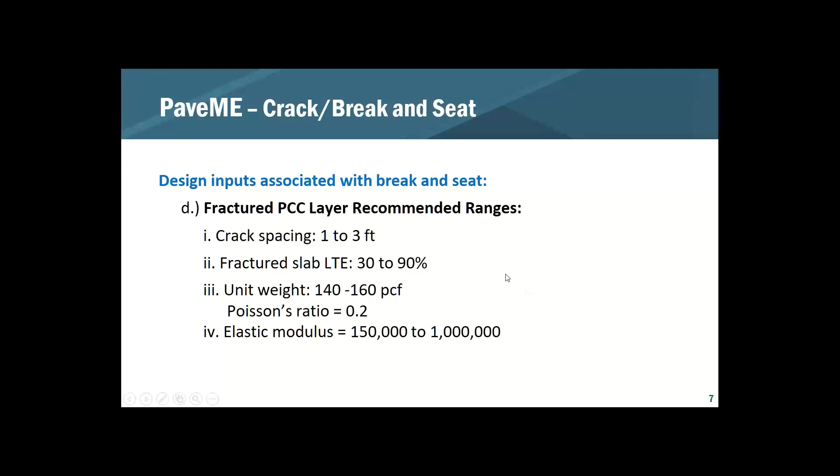The unit weight is just typical of that of concrete, and Poisson's too. And then the elastic modulus, the suggested range—I apologize, I forgot my units here—is 150 KSI to 1,000 KSI, so 150,000 to 1,000,000 PSI is what is typically recommended, and we'll talk a little bit more about that later.

Okay, so going into the project itself, the location of the project just coincidentally happens to be right outside of Pittsburgh, Pennsylvania, which is where I'm located. So this was kind of nice to have it nearby—it provides me with a better understanding of the site conditions.

As a 13.7-mile section, again, it was jointed reinforced concrete pavement. So you can see the city of Pittsburgh here, and then this was just northeast of that a little bit up the Allegheny.

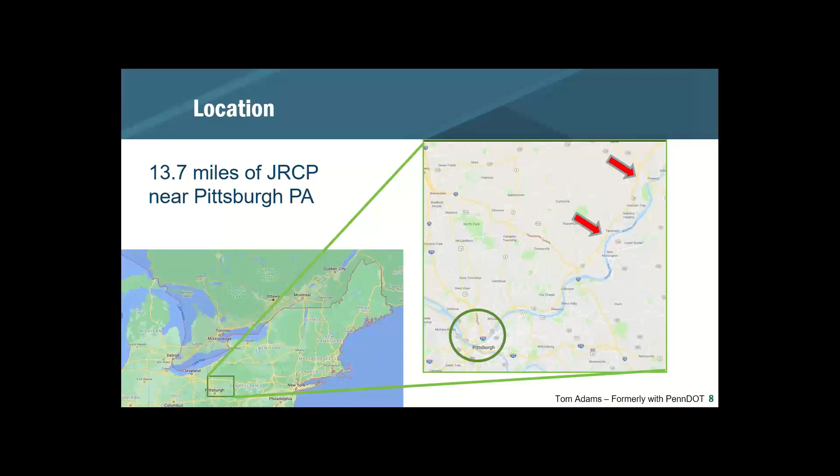So the project history: this existing reinforced concrete pavement was constructed in 1984 with 25-foot dowel joints. There was concrete pavement restoration performed in 2009, and then again—excuse me, in 2004—and then the break and seat was performed in 2021, with a 35-year design life used.

The CBR for the subgrade in this region—Pennsylvania uses the California bearing ratio—was 3 to 5. So the support condition is a relatively soft subgrade, which is always a point of interest when you're trying to do a break and seat, crack and seat, or rubblization.

Obviously you have to impose a lot more energy into the slab if you're going to do a rubblization, and it's hard to do that with such a soft subgrade. I believe that's why PennDOT chose to go the break and seat route as opposed to rubblization.

So there wasn't a lot of information regarding the distress prior to the overlay, but as you can see, there was a lot of patching, and again, it was noted that this was done in 2004 and 2009. So extensive work on the roadway prior to this.

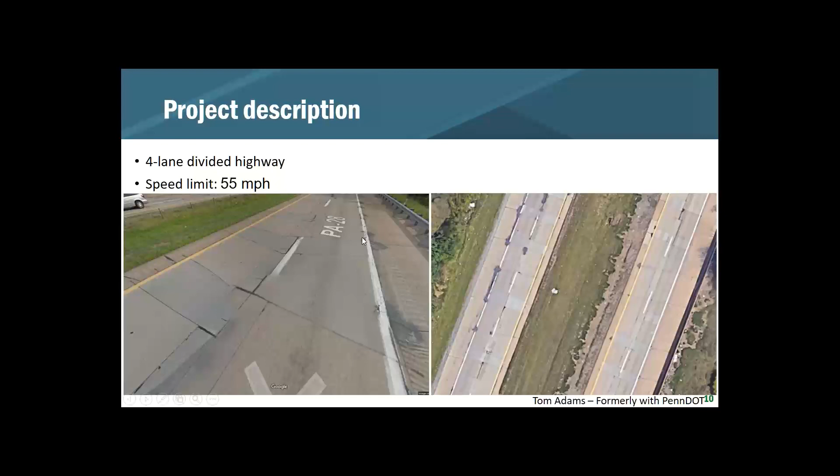So additional information regarding the traffic—relatively small. It was noted that there's still kind of a better feeling for ESALs, and I'm the same way, so I reported the ESALs here as estimated using Pavement ME. It's not a lot of traffic—the design lane had about 12 million ESALs, which is about 17 million heavy trucks.

For those of you that aren't familiar, the nice thing about those analysis folders produced by Pavement ME is they provide a lot of great information that's not necessarily depicted in the output PDF file, and one of those is the ESAL count. I think it's labeled flexible ESALs, an Excel file, but all of the files in there you can usually look at either in Notepad if it's a text file, or in Excel, and they have a lot of great information. I'd encourage you to peek in there and see what type of information you can get out of those files—there's a lot of interesting stuff.

Like I said, I do still look at both ESALs and heavy trucks when I'm looking through this, and you can find the ESALs in those files in the analysis folder. All right, so the current structure—this JRCP was 10 inches thick.

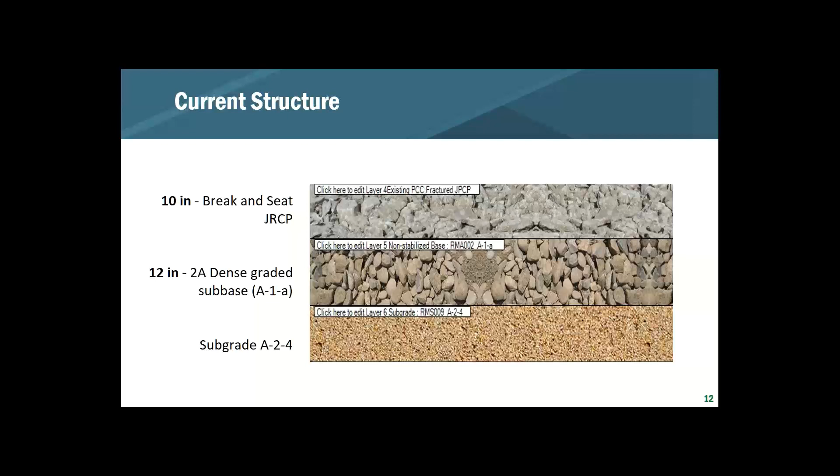And that was on top of 12 inches of a dense grade sub-base. For those familiar with PennDOT materials, it's a 2A, which again is a nice densely graded sub-base material. The subgrade was classified as an A-2-4.

And even though this is a webinar on Pavement ME, regardless of what design procedure I'm using, I typically try to look at a couple of different design methodologies, because they're based on different theories and using different data to develop them. So I always find it interesting to see what the other ones show, but it also helps me interpret the results of each individual design procedure.

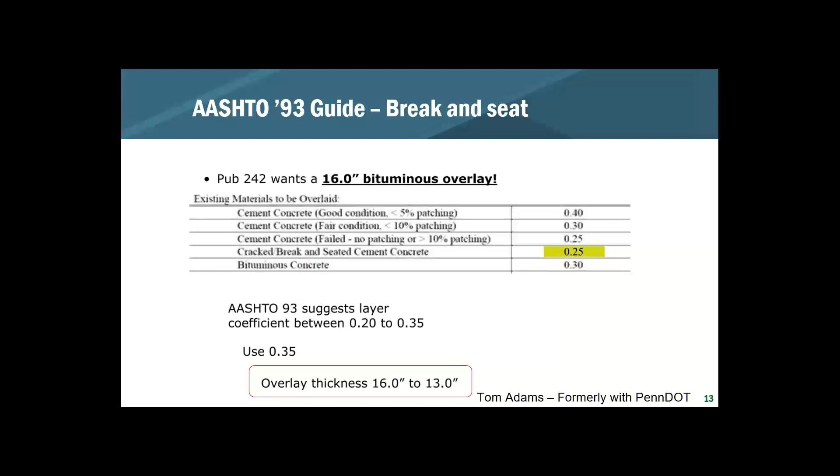So the nice thing was Tom Adams, again who was formerly with PennDOT, did do this design for this roadway using a couple of different procedures just to get a feel for things. He used the '93 guide, and that came up with 16 inches of asphalt, which of course is quite thick. So he looked a little bit further at the frost heave, and used a different predictor for the CBR, or the resilient modulus based on the CBR, and was able to get that down to 8.5 inches.

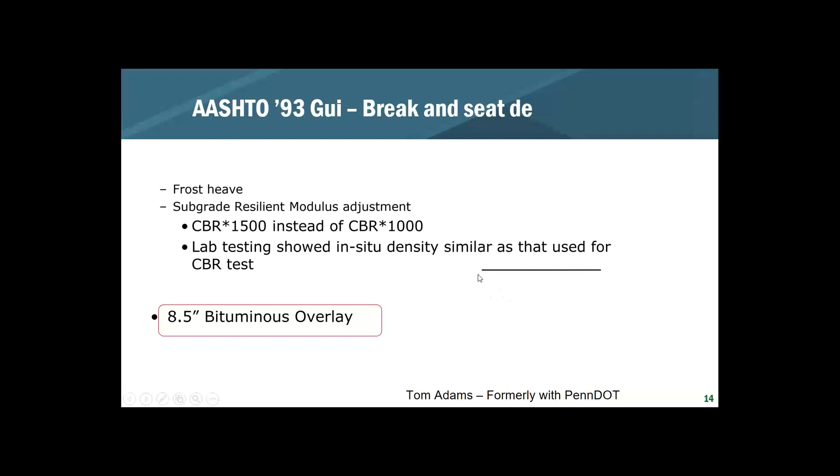But obviously that's a big jump, so they were trying to get a bit more comfort on going that thin, and they used the NAPA rubblization design guide, and that came up with 8 inches. They also talked to several other agencies. I think Tom had mentioned he looked a little bit at what Illinois was doing for something similar regarding the level of traffic and the site conditions, and they had some pavement structures out there where they did break and seat, crack and seat type of rehab with 8.5 inches, and they felt they got the expected performance out of it.

So just a little bit of background regarding what values they came up with outside of Pavement ME, and then just jumping into the Pavement ME itself.

So with Pavement ME, this is the break and seat design that I'm going to go through now. As we had mentioned earlier, the design type is an overlay, and then it's AC over JPCP fractured. And again, the question came up before regarding whether it's a JPCP or a JRCP.

That's just one option. Even with a JRCP, if you're just putting an overlay right on top of that, Linda had mentioned you can probably just use a jointed plain. And if you have ruptured steel at mid slab, for example this would be a 25 foot slab, and you found that most of it had ruptured steel, you could just make it a 12.5 foot joint spacing, and that might get you something in the ballpark.

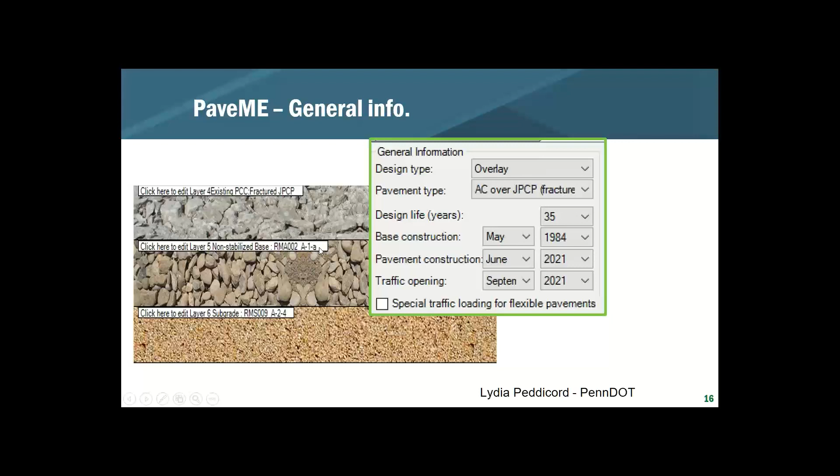So the traffic, again, I'm not going to go through traffic inputs. I think Linda did a good job describing that, and you're probably pretty familiar with that at this point in how to do that.

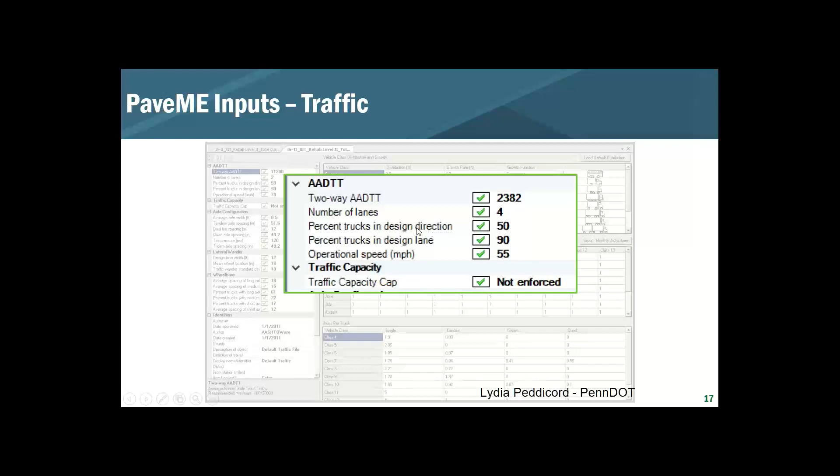But the traffic, as you can see, is not very high. The capacity wasn't enforced, but of course it's nowhere near capacity, so that's irrelevant. Only about 2,000 trucks a day. So again, not a lot of traffic, 50% in each of the design directions, and 90% of the traffic was assumed to go in the design lane. And that equated out to about a little over 12 million ESALs throughout that 35-year design life, and 17 million heavy trucks.

Again, climate, the weather data of course was used for the site in the Pittsburgh area. And I think at this point, that's similar with all of the other Pavement ME designs, so I won't go into the details, but just to give you a feel for what the climate is in this location as we look at the different types of distresses that develop. We do get some winters with snow, but it comes and goes relatively quickly, so we have a lot of freeze-thaw cycles and not really a deep freeze. We do get a lot of rain, so there's a lot of precipitation.

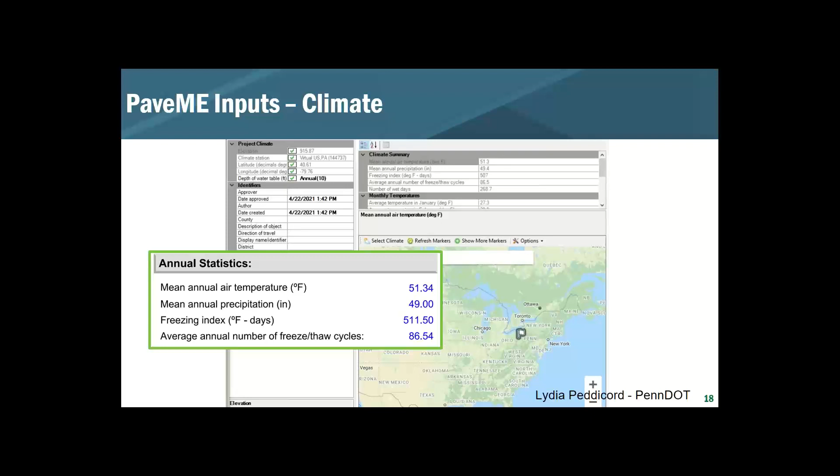Now, the same thing with the strength. If you're going to subdivide this into 2 layers or 1 layer, you can define the strength by back calculating deflection information, but of course that has to be done after it's fractured. I think one of the nice things that PennDOT does is that they have that as part of the criteria, so if you define a value that you want, they can do the back calculation during construction to make sure that's being achieved.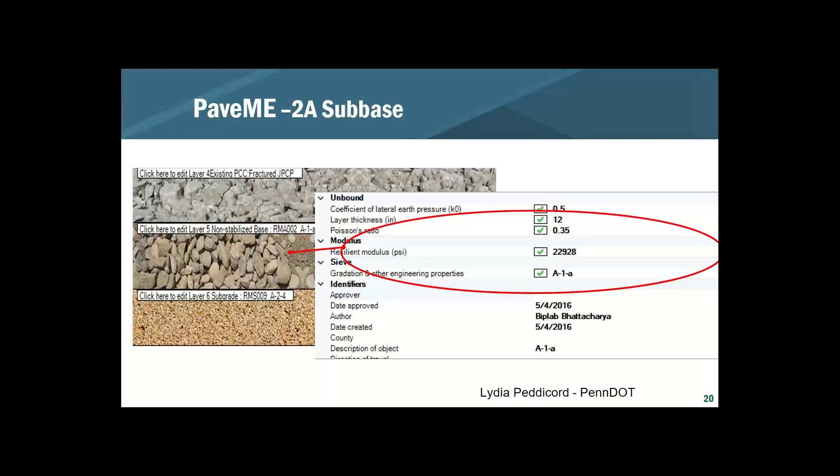Okay, so regarding the 2A subbase, this is a standard material again for PennDOT, and this information is available in their materials library. For this design, it was about 23,000 PSI for the resilient modulus used. And then for the subgrade, again, the CBR was around 3 to 5, and the resilient modulus for this was 7,500. So you would define these parameters just as you would with any other design that's not associated with a crack and seat or a break and seat.

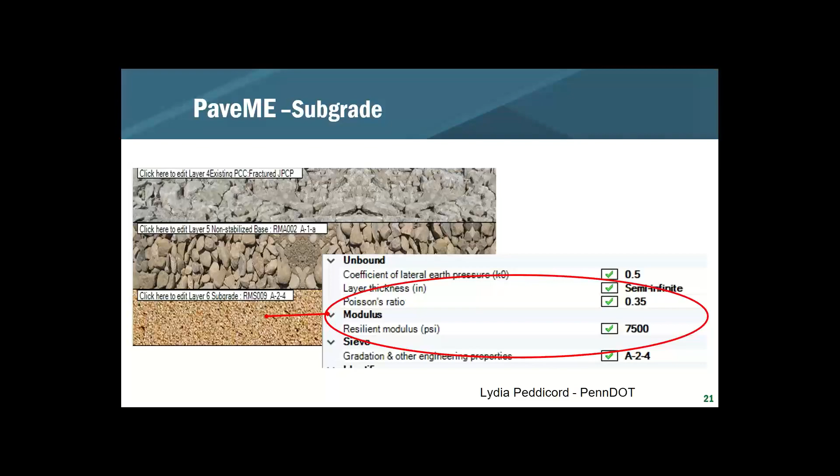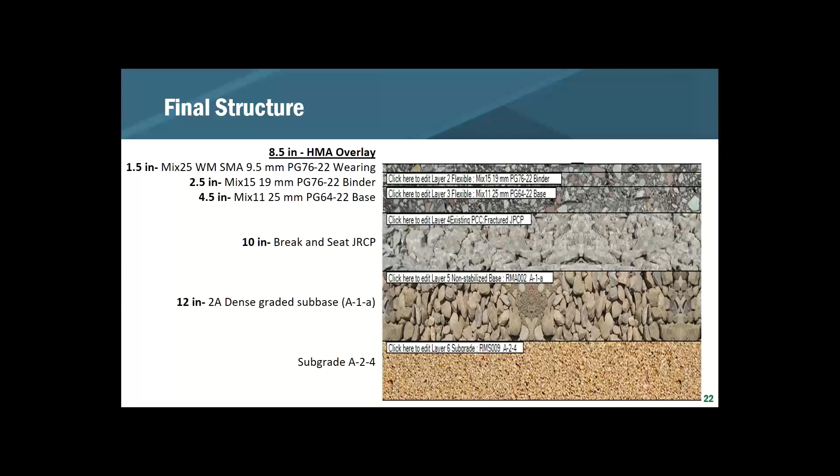So with this pavement, which again is a common structure that they have, they use the Level 1 inputs from the materials library they have for these materials. Lydia went over defining the Level 1 inputs, so I'm not going to spend time doing that again here. All right, so then we ran the analysis, and this is what the results were.

And just as Lydia had mentioned, increasing the thickness of that overlay did not help with eliminating the reflective cracking. I went quite high, I think up to 20 inches, and it still wasn't able to meet that.

But the other thing you can adjust is your load transfer efficiency that you assume between the particles, and the distance between the cracks. Remember, we selected 2 feet here, but neither of those were helpful in changing that either. So this was the final design that PennDOT moved forward with, and I kind of see why they would feel comfortable with that.

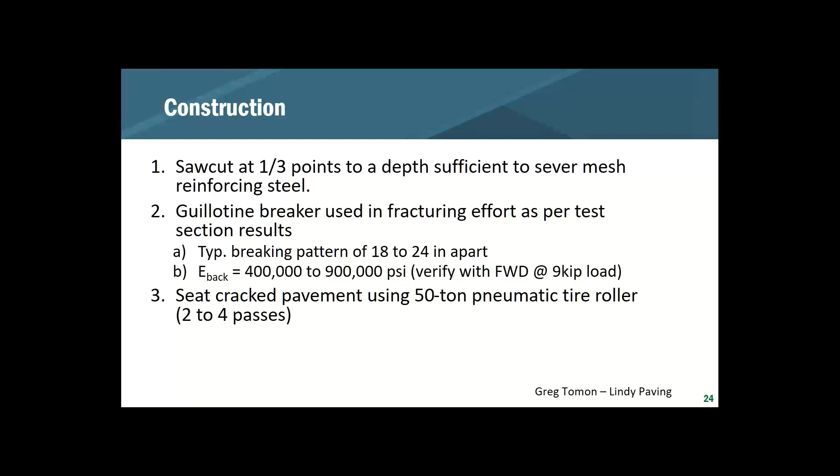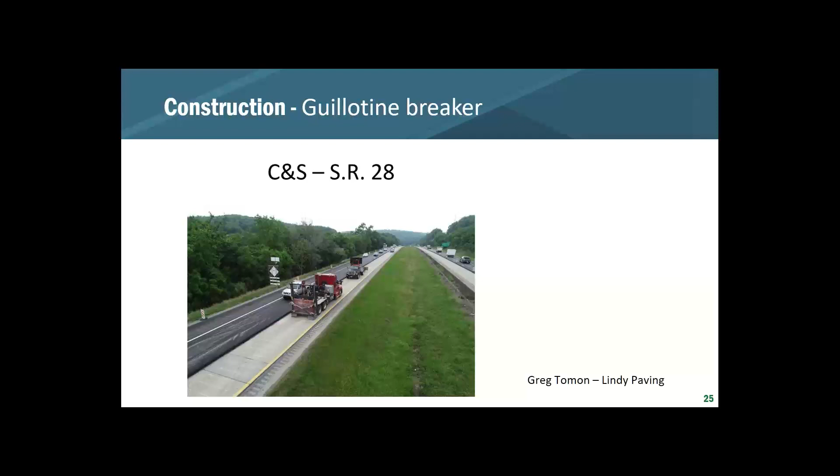After that, they seated it with the 50-ton pneumatic tire roller, requiring 2 to 4 passes. This was the project. As you can see, here's the guillotine that they used to fracture the pavement, and then you see some FWD testing. Again, thanks to Tom from Lindy Paving, or Greg Tomon from Lindy Paving, for providing these photos and a lot of the information on this aspect of it.

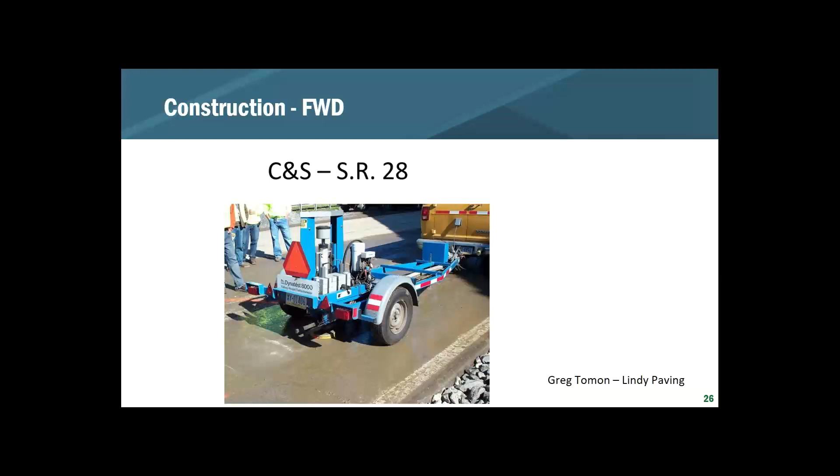And again, they used a 50% load transfer efficiency, which I think is probably a pretty realistic value. So the nice thing about doing that FWD testing, of course, is it provides you information regarding if you're achieving the inputs that you use in Pavement ME, but also gives you future information for what you can achieve. So when you're designing these inputs on other sections, that becomes valuable information.

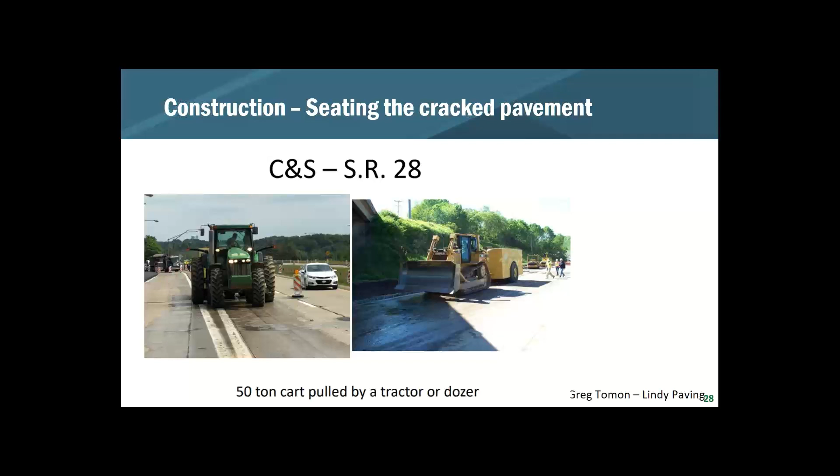And then they're seating it here, and there's the final product. So again, the whole idea of just kind of going through some of the things that PennDOT does, I think it's nice because it sort of gives you a closed loop system. You can't really know the elastic modulus ahead of time, but you can know what the target value is and know what you're achieving by measuring it on that test section that they have.

All right, so again, they chose not to look at rubblization on this project because I believe the CBR is so low, and it would be very difficult to rubblize this 10-inch JRCP on such a soft subgrade, but I still wanted to use it as this design example since we had a lot of great information.

Going back to what we were talking about before regarding design inputs that are associated specifically with rubblization, focusing on those, you had the design type, and again, it's an overlay in a sense, but it's treated as a new pavement, a new flexible pavement, because that rubblized layer is treated as just a granular layer beneath it.

So for the rubblized layer, that can be either treated as one layer or subdivided into 2 layers, and you can select which one's most appropriate based on deflection data. So the idea is that the particle size distribution is going to change with depth, because obviously all the energy is imposed in the fractures at the surface.

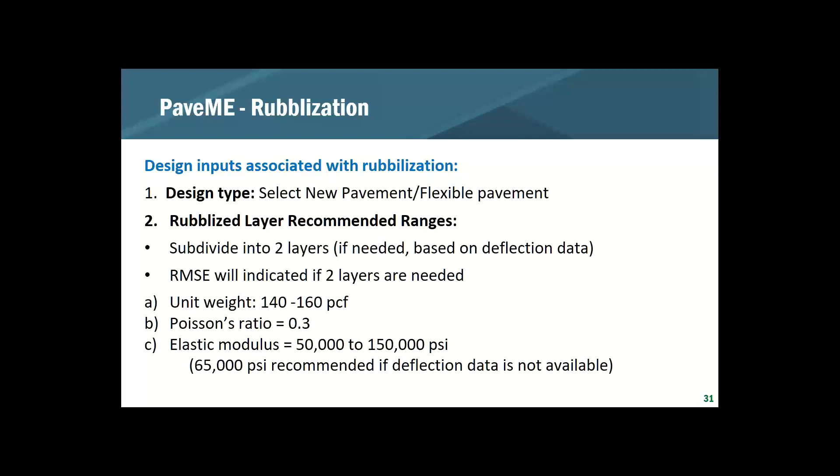All right, so again we're going to go to a new pavement, and we have our recommended values. If we enter them in, we see the inputs are the same regarding the base as constructed, when the jointed reinforced concrete pavement was actually constructed in 1984, and then the new overlay will be placed in 2021.

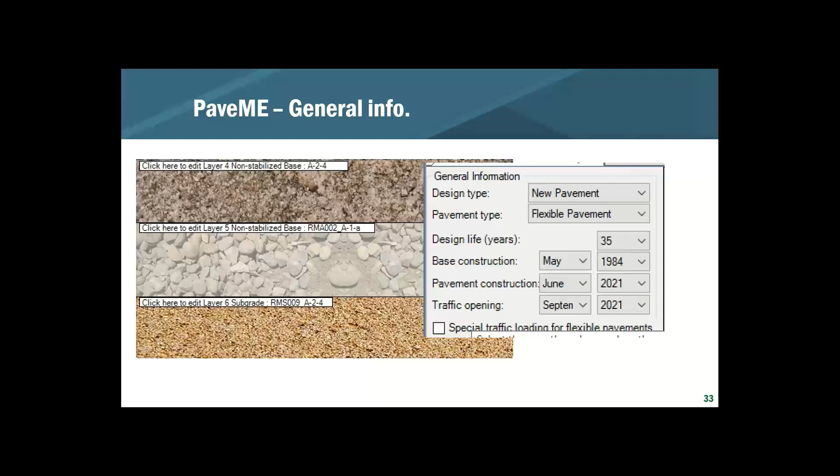So we have a new pavement, a flexible pavement. Again, it's relatively simple now when we're characterizing this rubblized layer. We're going to enter in a resilient modulus, in this instance just 65, because we don't have a better value at this point to use, but again, we can do FWD testing under a test section to make sure we're at that value when we actually construct the road.

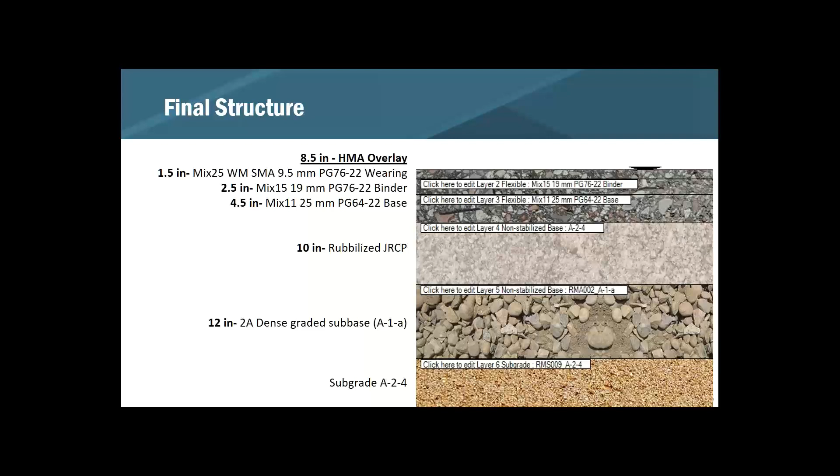So again, using the 3 layers that PennDOT used for the break and seat, and if we have an 8.5-inch overlay, now we have 10 inches of rubblized layer, and then our 12 inches of dense graded base on top of our subgrade of about 7,500 PSI. And this is the results that we get.

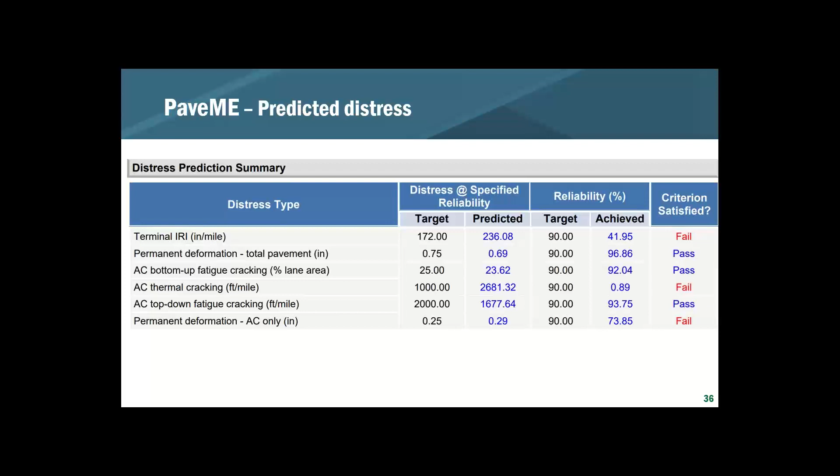And so as you see, it looks like we're passing, with the exception of the thermal cracking and also rutting in the asphalt layer. We're not going to design out of that, of course. That's going to be a change in the binder type. But I think PennDOT's pretty comfortable with the performance they're getting with respect to rutting in the asphalt layer and thermal cracking. So I'm not too concerned about those.

So that's all that I had to present on crack/break and seat and rubblization.

I think we have time for a couple of questions, right, Kelly? Yes, we do. We have 10 minutes to work with. We do have one question in the poll or in the questions box.

The question is, for the design you showed, should the number of lanes have been 2 or 4? I think maybe your slides showed 4, but I think it should have been 2. Yeah, you're right. I'm not sure if there was a section along the way where it went to 4 lanes, or if it was consistently 2 lanes throughout that section of roadway. But the input files that were generated had 4 lanes, so I'm thinking at some point it went from 2 to 4. This is an urban area that connects the northeast suburbs to Pittsburgh, so I'm thinking the number of lanes changes as you go outward. It was a 13.5, almost 14-mile section. So maybe Lydia might have more information on that. Yeah, from what I saw, it looked like a 4-lane, and probably at some point gets closer to the city and turns into a 6-lane.